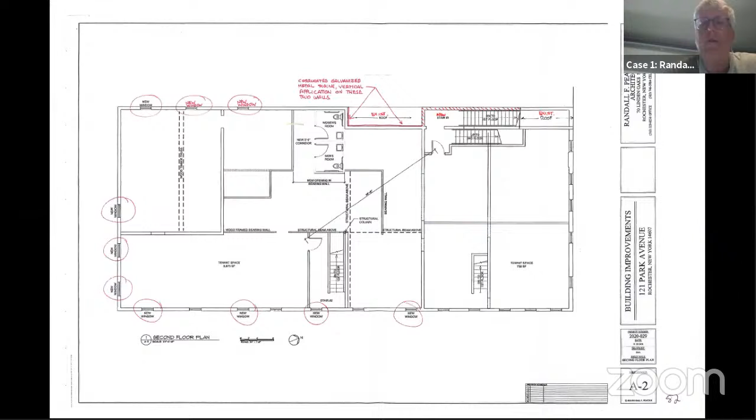You'll see on that floor plan on A2 there's another stairway to the right. That doesn't go outside. It's a stair that's been hacked up and is no longer accessible from first to second floor, though it does go second to third. What we are proposing is on the west side of the building, the construction of a new stairway.

There's about a 4.5 foot wide space there between our building, the original exterior wall of the 3-story structure, and the wall of the building next door. I provided you a photograph in there. Hang on, let me look back through here to see which one. I think it was photographed...

Stairway along there. I believe this might have been an exterior stair at one time that went up. It's very original. Randy, sorry to interrupt, you cut out for a second. Did you reference a specific page?

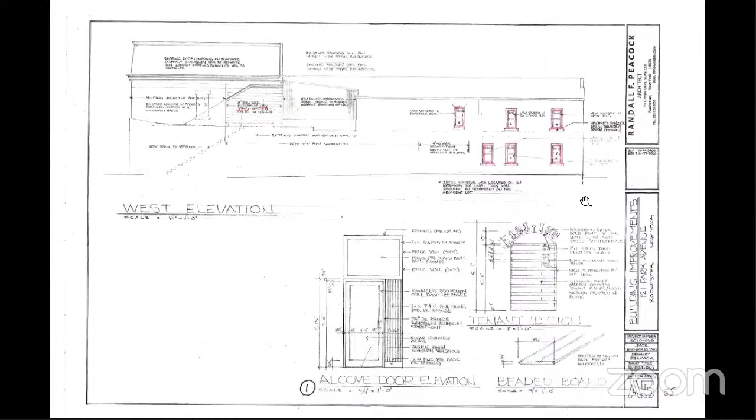Photo 3 on page 3. Okay, so we're looking at page 3 then. I'll go back to that for you. You can see in this photo there's a little bit of a diagonal ghost of a stairway that once was in that area. So is it the hand numbered page 3? Because I'm looking at page 3 and that's actually the staff report package page. My number in my report that I provided. There you go, next, right, okay, there. So it's actually hand numbered page 9. For the purposes of this, let's stick to the hand numbered, because there's other documents in here, and just for the record it's easier that way. So page 9 of the, yep. I'm just going to add 6 to mine because I wasn't able to print out your report at this point in time.

But you can see there's a little bit of a dark ghost in there on that wall that follows down through. We believe that might have been an exterior stair at one time. When this building was remodeled sometime in the 20s, brick was added to the facade, and I believe at that point that little 4 foot wide alleyway was enclosed to become interior space on the first floor. On the second floor, there's a small original wood door in that wall that went out there, so it looks like there was probably an exterior stair that went up to a door.

In any event, this stair location serves us by providing the proper distance between stairs and giving us another access directly to the exterior, allowing me to connect that direct exit all the way up to the third floor so we can have a direct egress from that third floor down and out of the structure.

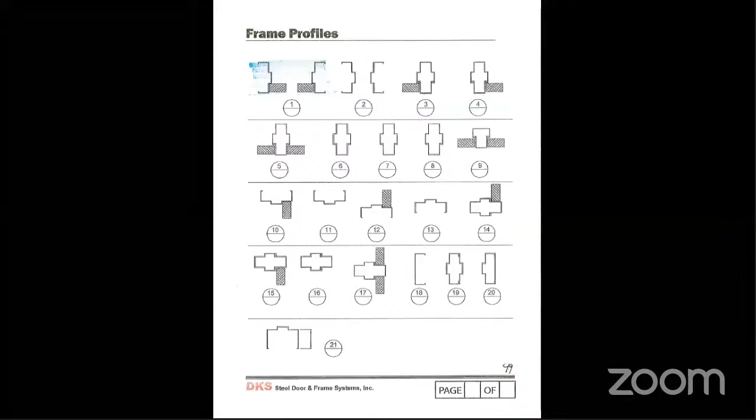Yes, thank you, Chris. There is public testimony. Let me get that promoted - the person that we have present with us this evening to the meeting. Okay, perfect. So this letter comes from the Park Meigs Neighborhood Association, John Lembach. John is actually going to speak, so maybe the time is better spent for that.

John, would you like me to read anything, or do you just want to speak on the record? Is he here yet? Is that what you... oh, there you are.

I largely agree, and the board largely agrees with the comments made by the board members so far at this point. We only had a few.

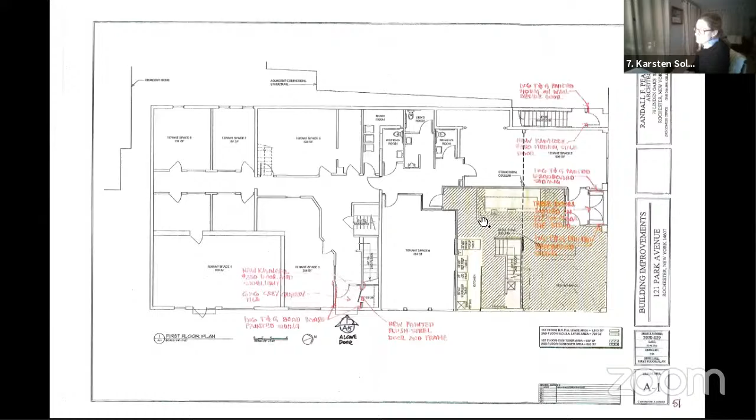I think I personally am okay with a modern fixture, especially if it's a dark bronze. I think it won't really stand out that much, especially on the non-primary facade. So all in all, I'm personally okay with the proposal as it stands. I think everything else makes sense — the location of the light, the stair for egress purposes, the inset of the door, the roof — I think it all makes sense.

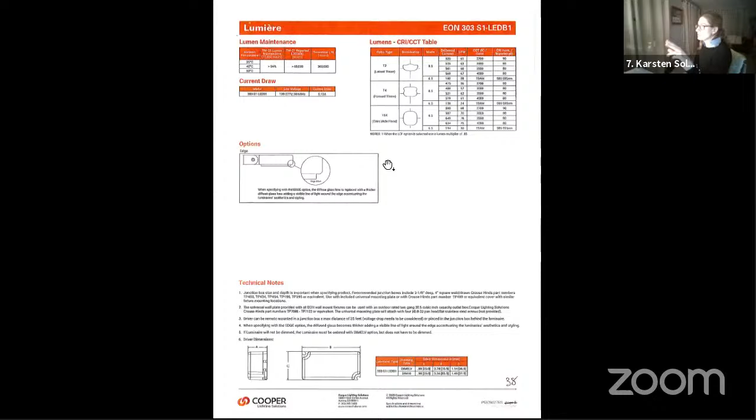Yeah, from what I understand, this is only going to be used one time, on the non-primary facade. This is the fixture on page 38 that will replace the gooseneck currently on that facade. There's two other fixtures that would be flanking the main entrance, and that's almost a fixture that replicates what's already there. It took me a while to kind of...

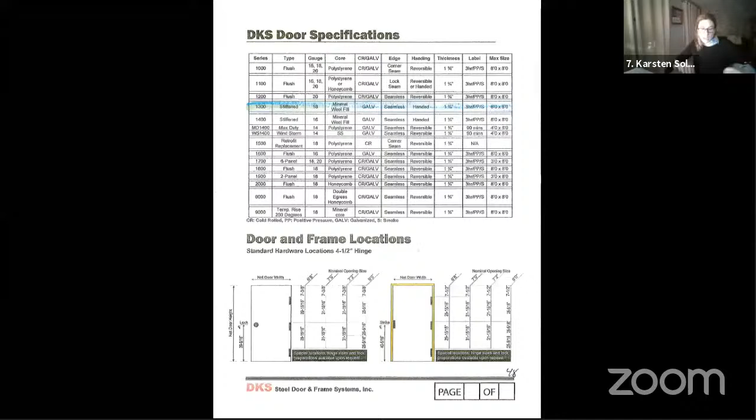Karsten, you don't know what page those other fixtures are on, do you? They're in the packet. I missed them at first too, and I had to dive back in through them. There, right there.

Karsten, I apologize — did you address the window, the upstairs window we were talking about proposing? Yeah, I think Isaac's suggestion is great. I'm just a little bit uncomfortable, and this might be a Tom question, about asking them to extend the scope of their project on our whim. I don't know if we can do that — it just wasn't part of their original scope of work.

Yeah, it's okay. Even the architects said it would be acceptable. Regardless, you can impose — when we're altering that side of the building — as a condition of approving the other work, that replacement or bricking in that you're contemplating at this one window. Okay, then I would support it in that case.

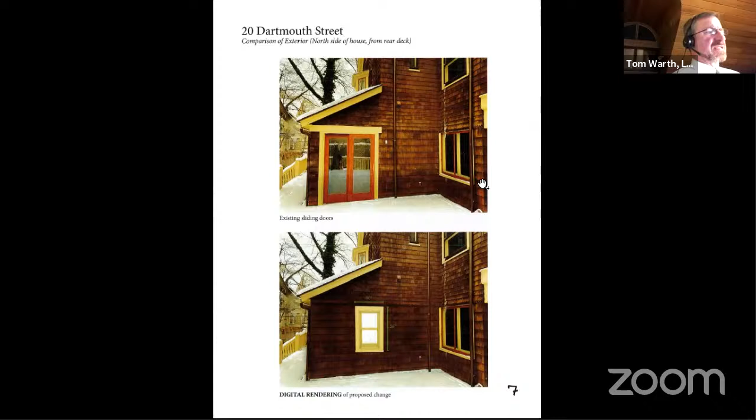Okay, Kajana. Let me ask the other part that Jim was talking about, the way the shingles came down in an unusual way, at the top of the window frame. Is there an intent to kind of match that approach with this new window as well?

Well, until I really get in and remove the slider that we're looking at, we are going to do everything that we can to match the way the other windows on the first floor are integrated with that little detail of the cedar shingles above. So if they are on a plane, and it looks like they are on a plane that is proud of the wall beneath them, then they'll remain that way. We're not going to probably be getting into changing structure, but I don't think we'll need to.

It's a little odd from this picture for me to see. It looks like the head trim of the slider looks like it's flush with the little cedar cut detail, but I'm not really sure how that would work. I can't see well from this picture because the plane underneath it seems like it's set back a little. So we will most likely be, well, we will not most likely, we will be in the plane of the lower section of the wall.

So that means the cedar above is going to have that cedar detail, that little sawtooth detail. They're not going to be on the same plane, the two walls. So that's going to create that little mini overhang above the new window, if that makes any sense. It does.

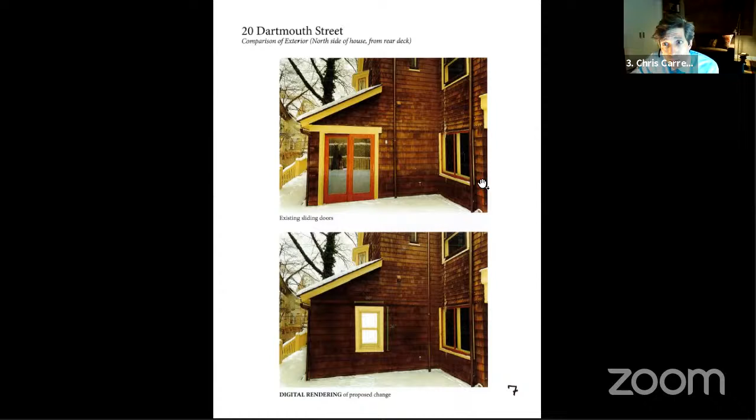Kajana Crawford, any questions for the applicant? No, my questions have been answered. Thank you for a very good proposal, and the house has a lot of character. I wish you well with it. Thank you, Kajana.

Yeah, I have a couple of questions, and a lot of them have been answered, and I'm glad to hear that everyone else has asked about the proportion of the trim around the perimeter, because the photos of your house actually don't do it justice until you actually see it in person. Just the detailing of the trim around the windows, the scale of it is so fine. I'm glad we're going to be replicating that.

But I did notice it looked like all of the other windows are leaded glass. Is that correct? No, on the rear of the building, the house has double hung windows for, I think, every single window with the exception of the one to the right. That would have been the formal dining room, and then to the back, I'm not quite sure where the original wall ended. It was like a butler's pantry, and the rest of the kitchen on the opposite side on the first floor has the double hung windows as well.

Okay, I only saw it from the street, so I couldn't see around the back, and it was hard to tell - is it leaded glass? There was a bit of snow, and they're dark anyway, so you really can't see the caming in the windows. So I wasn't sure. And Chris, could you go to the rear elevation?

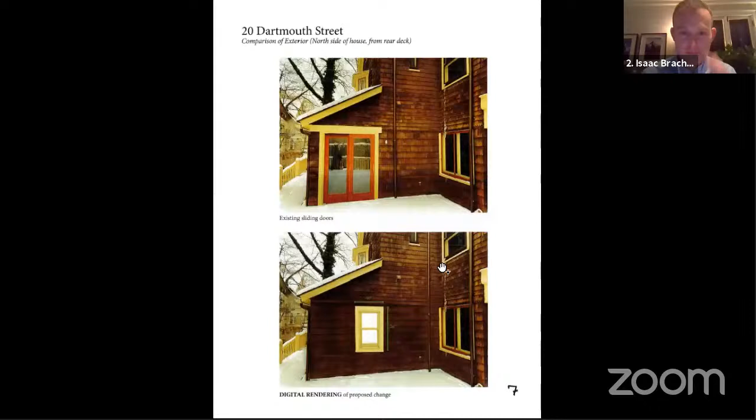I had one comment on that proposed - page 7, this page? No, the one that showed what they're proposing on the rear. Yeah, this one. My only concern about this is that if you look at infilling that door, I'm concerned about the expanse of solid wall on the first floor.

It looks a little bit like it was some sort of addition. It looks like an addition when you have that much solid space. And I know that there's a shower there being proposed. But I would encourage you to look at some other fenestration or opening on that portion of the facade.

Would it be possible - we were planning on having some gardening work in the back and possibly having a lattice or something that wasn't necessarily a part of the house, but was in that negative space, that carried off some of the detailing that's in the porch that faces the front, that faces Dartmouth. There's a little bit of a detail on how the wooden railing is, but maybe replicating some of that in a trellis with some plantings and some greenery. I think that could be appropriate.

Yeah, and you do see that around Rochester and some other homes.

I'd have to look at some of the detailing on this one to see particularly what, but I think that's something that definitely could be a good solution. That would be something that wouldn't necessarily be physically attached to the house, but more an accessory once the renovation was completed.

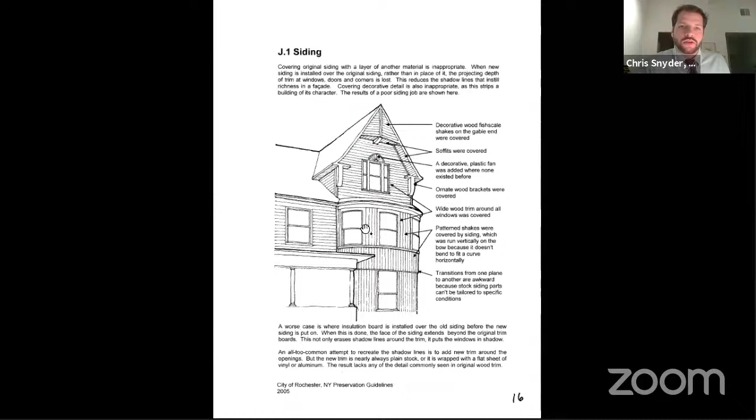We do have one public comment that came in for this application on Tuesday, February 16th. Dear Preservation Board, I am in favor of the homeowner's request. The materials used are far superior, robust to last, while preserving the architectural values too. It will also aid in the comfort of the occupants of the house. Sincerely, Steve Curran, Senior Product Design Engineer of General Motors.

So that's the only public comment that we received. All public comments were required to come in by 5 p.m. yesterday, March 2nd, to be included in the public record.

Okay, thank you. Kelly, you have the opportunity to rebut if you'd like - you don't have to, but you have the right to. I just think it's very sweet. I know it's very easy oftentimes to submit angry letters of things we don't approve of, but it's really nice when someone goes the extra mile to say, I like this, and thank you and good luck. So thank you, Mr. Curran.

All right, thank you, Kelly. And Chris Snyder, we will close - did you want to close this case to the public? Yes. So we'll close this to the public, and then we're going to go into deliberations now. In deliberations, there is no interaction from the public or the applicant, and board members will discuss and vote.

Great, thank you, Chris. So Kirsten, we'll start with you - your thoughts, please.

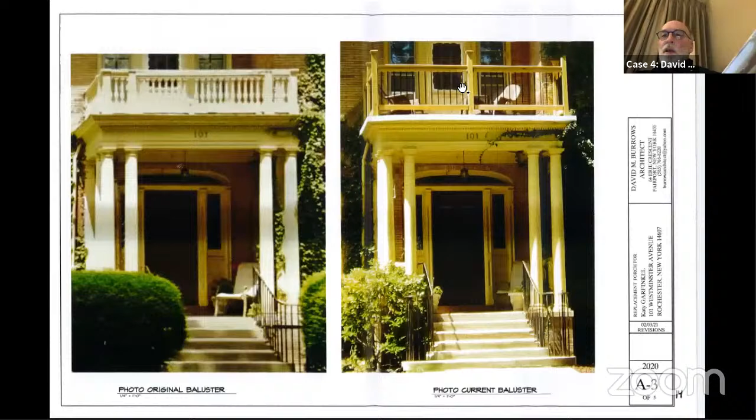Let's see, there, next one, there you go. So the right view is its current condition, and as you can tell, that looks not much like its original version, which is evident in the photograph on the left. That photograph is what I got from the upstairs tenant. That's the only evidence we have of how it used to be. All of the original wood baluster was removed and disposed of, so all we have is the photograph.

So I measured the whole front entrance and sent my drawings with this photograph to two porch baluster companies, and the one we focused on was American Wood Porch, American Porch. They provided copies of their replacement products that most closely matched what was originally there. So I designed the replacement baluster based on those products, which now looks very much like the original photograph. Those drawings are elsewhere in the set. I've got a building section and elevations, so we should be able to replace pretty exactly the original wood baluster after we remove the pressure treated wood and aluminum baluster system.

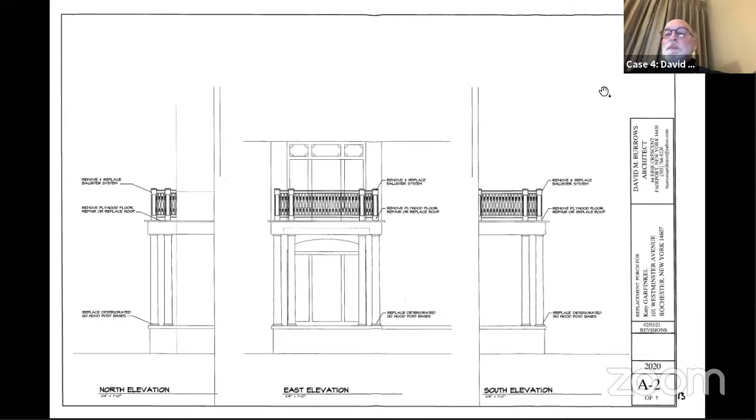Thank you, Mr. Burrows. Katie, did you want to say anything at all?

I just wanted to give a little background as to why this has been such a project. My dad was actually the owner of this property. He owned it since about 2006 and recently passed away in 2019. So the property kind of just fell in my lap with no previous property ownership experience. When I became the manager, the property still was in probate, so I'm not the owner yet, and it had been neglected for years, probably about 5 years. The balcony was completely deteriorated and pretty dangerous.

So I hired somebody who had no real experience doing a balcony like this, and I wasn't aware that I had to go through this whole process of getting approved by the board. I had no ill intentions of going above anybody's head, I just wasn't sure of the process.

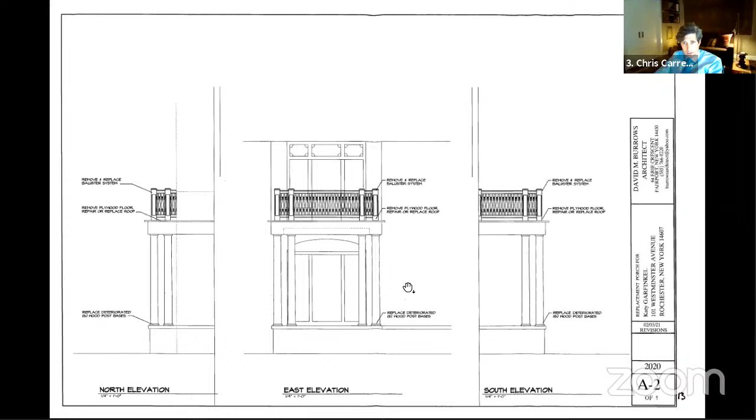Did anyone want to talk about the landscaping at all, or give us a quick rundown? Oh, that's Katie's.

What was there previously were overgrown bushes. So after I tore down the balcony, I ripped out the plants. I wanted to put in all new landscaping. I put together a little key and drawing for where the proposed landscaping will be, on pages 8 through 10 for reference. The plants I've proposed are pretty original to the neighborhood. I also have some plants still in there that I'm just going to get another copy of. There's Rose of Sharon, rhododendron, 2 snow mountain spireas, 4 drop seeds, and 1 dwarf mountain laurel that I plan on planting. It's going to be really low maintenance but modern landscaping. Well, thank you both for the presentation.

We'll go through to the board members for any questions they may have. We'll start with Kirsten Solberg. Any questions, Kirsten, for the applicants?

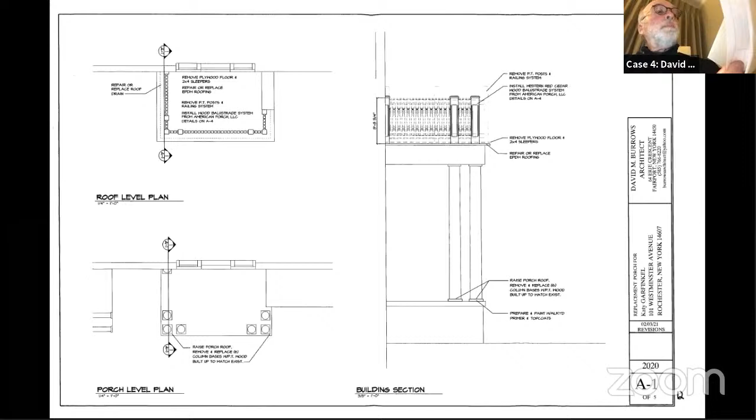So do we think that's what it was originally? Yes, because there are paint ghosts on the brick, and it was that high. Okay, so fortunately it meets code. It's just interesting that it's being used like that, you know what I mean? Right, the door was put in. It previously was a window. Someone made it into a door and then a balcony.

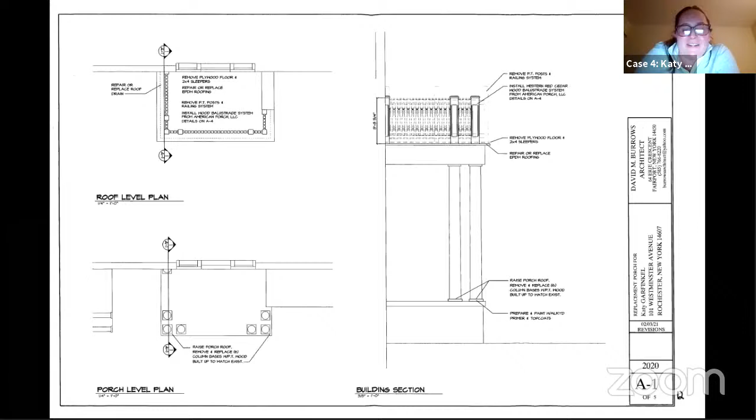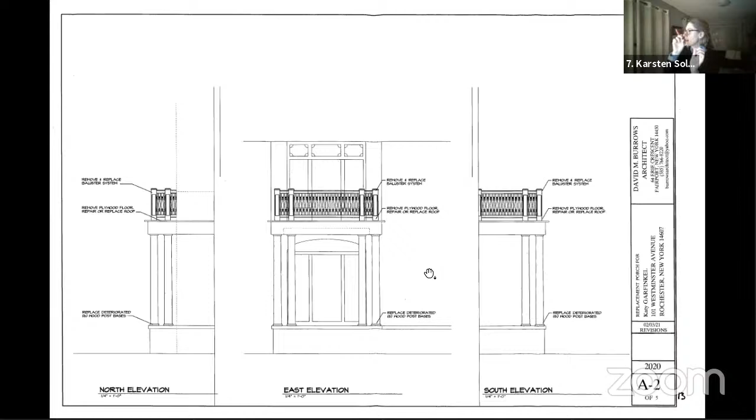My other question, and I'm asking this because I have a similar condition on my own house, is I see that you're putting on an EPDM roof potentially. If you look at the old photo and the new photo, notoriously... I'm wondering how you're going to address that drip edge around the perimeter. You can see in the old photo and the new photo, the new is very clunky flashing. What's the detail there? Yes, the reason the new one looks so clunky is that it's covering up plywood and sleepers, built up from the old roof.

So the solution will be to take it back down to its original level, and hopefully the original drip edge is still there and intact, so we'll salvage that. If we can't, we'll replace it, but it'll just be a minimal metal drip edge, like it would have been originally, probably copper. And how does the roof drain?

Now, interestingly, there's a gutter that you can see, especially in the right photograph. I don't know if that's PVC, but it's odd. I haven't explored that much because you can't tell what's up there because of the plywood. There may have been an original gutter and downspout that's still there, so whatever is there, we'll discover when we pull off the plywood.

There is an original gutter towards the left of the building. Plywood is covering it up right now, but the original one is still there because we were having a drainage issue. I have an issue on mine where it's deteriorating the front step, so just something to be aware of. But those are my questions.

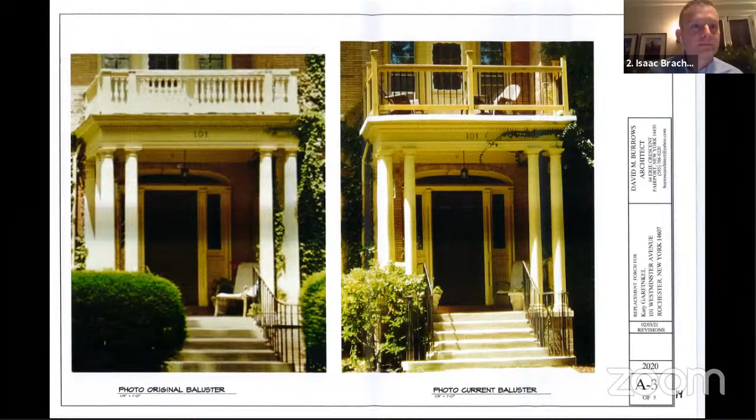Thank you. Isaac, any questions for the applicants? No, I think everybody's covered the questions I had. I think this is a great project and it's a big improvement from what is there now, and it's going to be a great addition to the neighborhood. Deborah Beardsley, any questions? No questions. I think it's an excellent proposal and it's very appropriate.

Great, thank you. All right, I have one question for our code inspector. Has this been looked at in terms of the height being okay for being a porch like this?

Yeah, from the code perspective, we would accept the historical height, so if there's some way to scale it to figure that out, we would accept that. You don't have to meet the current code. It sounds from the testimony that they did that by uncovering evidence about the painting marks from the prior ones. Okay, that would be acceptable.

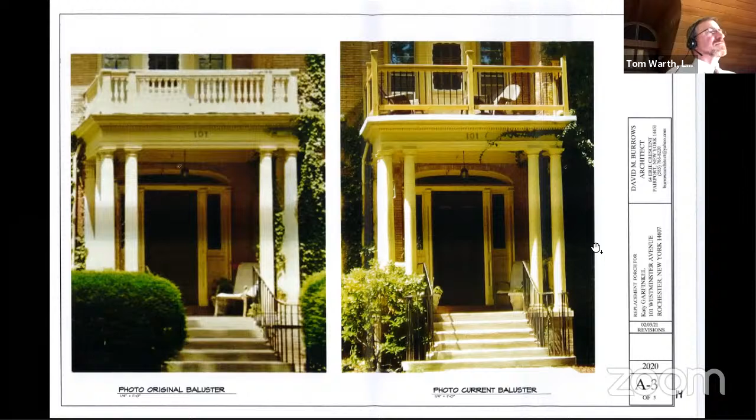Thanks. Great. If the board has no further questions, we'll go to Chris Snyder and see if there's any public testimony.

Yes, there is one comment of public testimony that was submitted on February 16th. This comes from Gail Fountain. Gail writes: 'The property proposing a project at 101 Westminster is our neighbor, and we often have occasion to pass by the house, so have witnessed the progress and improvement being made. One can see that there is a thoughtful and genuine effort being put forth to improve the look of the home and contribute to the quality of the neighborhood. Walking by, the other neighbors always have positive comments and appreciation for both the replaced deck and for the removal of overgrown and unattended plants at the front of the house. We are optimistic that the owner is continuing with these noticeable improvements and appreciate that the appearance and quality of the house has greatly improved through the owner's works and efforts. Thank you, Gail Fountain.' This was the only public comment we received.

All public comments were required to be received by our office by 5 p.m. March 2nd, which was yesterday.

Katy or David, if you'd like to rebut anything that was said, you're more than welcome to. No, I don't have anything. Thank you all for your attention and your interest in this and for your feedback.